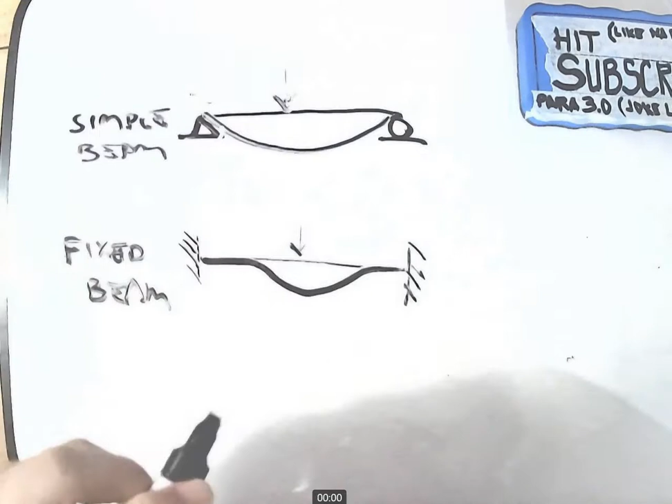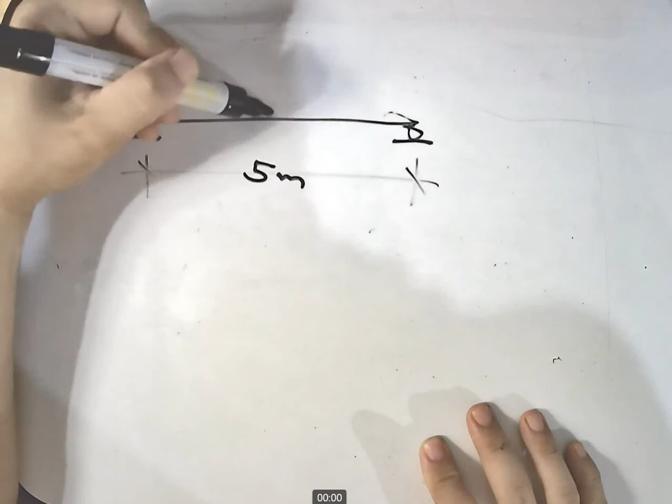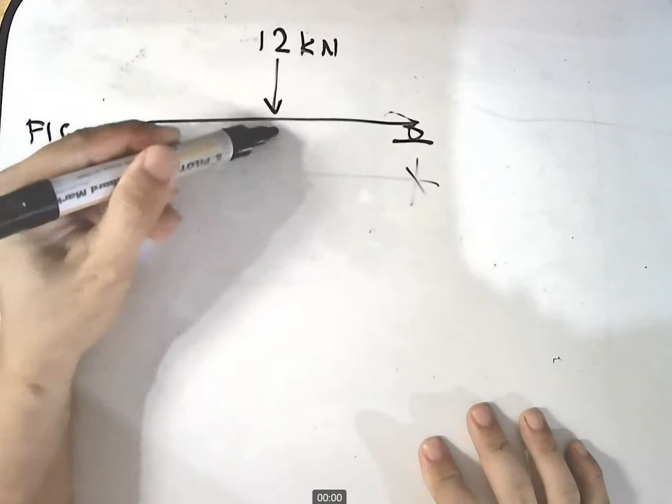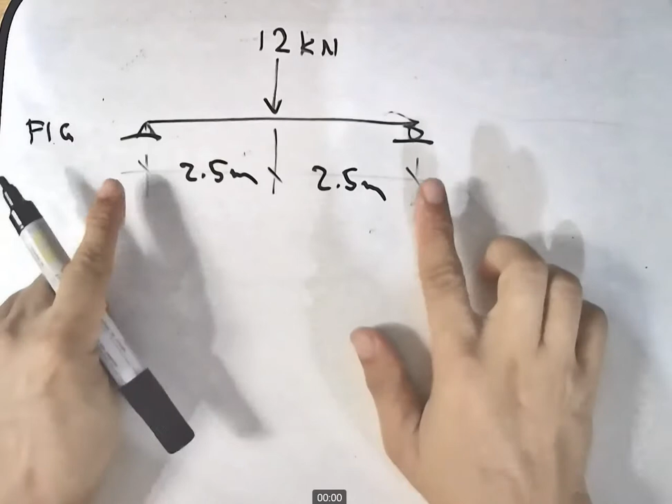So let's say, meron tayong simple beam, pin connected, roller. Ito yung figure. And then, meron siyang length na, let's say, 5 meters. Naglagay tayo ng concentrated load na 12 kilonewton sa gitna. Kapag sinabing gitna, so, magiging 2.5 and 2.5 meters. So, ano ang bubuhat dito sa 12 kilonewton?

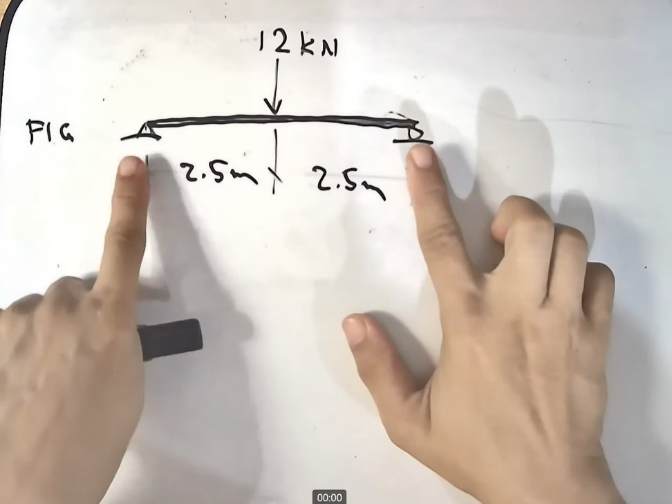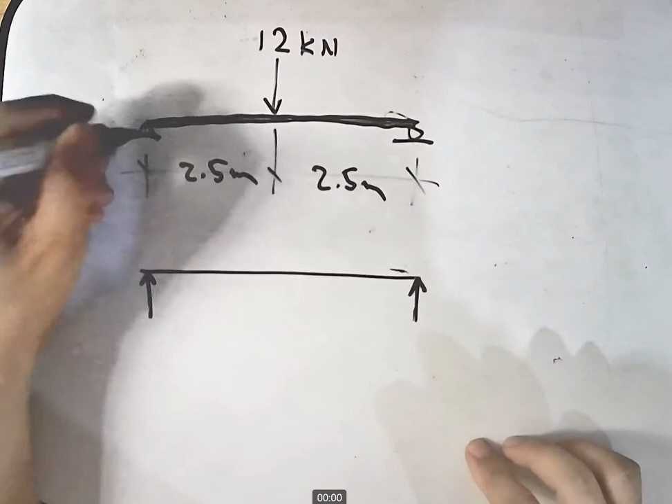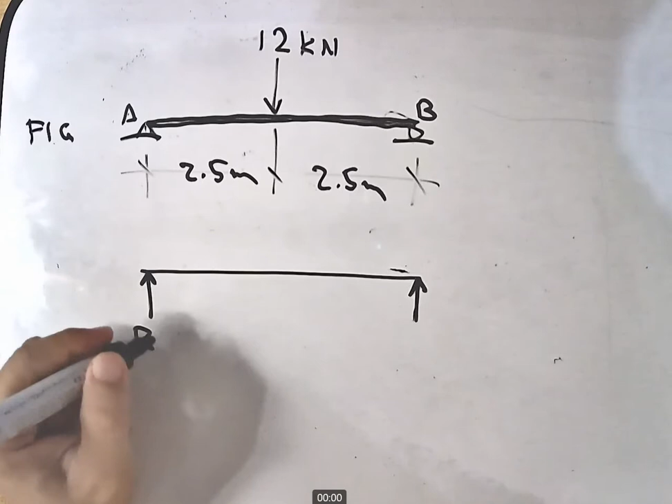So, let's take this as point A and then point B. So, meron tayong vertical reaction dito. So, RAV, then RBV. So, this simply means reaction at point A vertical, reaction at point B vertical.

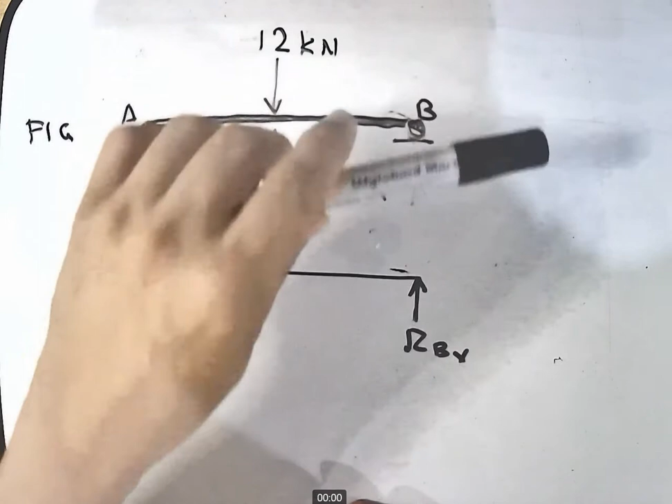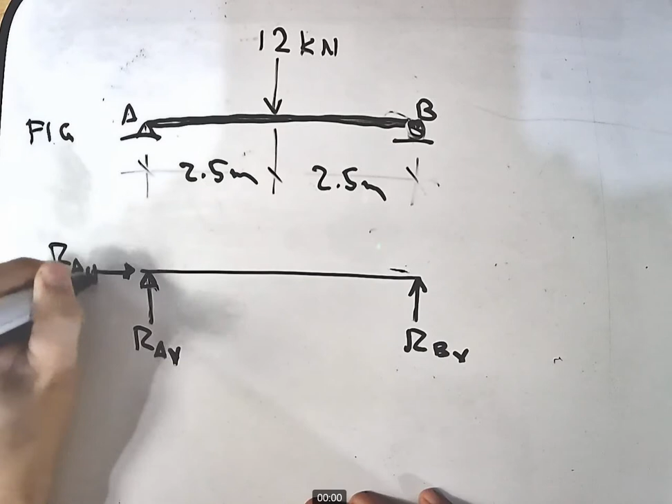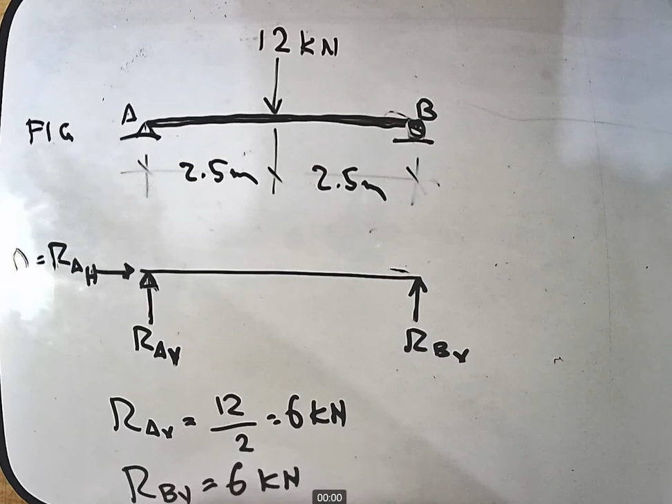Okay, so let's take this as RAH. But since wala tayong horizontal load, your RAH is equal to 0. And then, now, notice na nasa gitna yung 12 kilonewton. So, reaction at AV now is equal to 12 divided by 2. So this is now 6 kilonewton. Likewise, reaction B vertical is also 6 kilonewton. So, as a check, summation forces vertical is equal to 0.

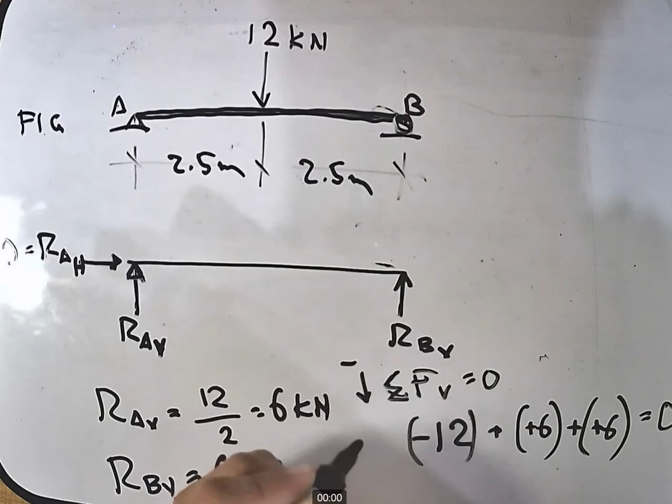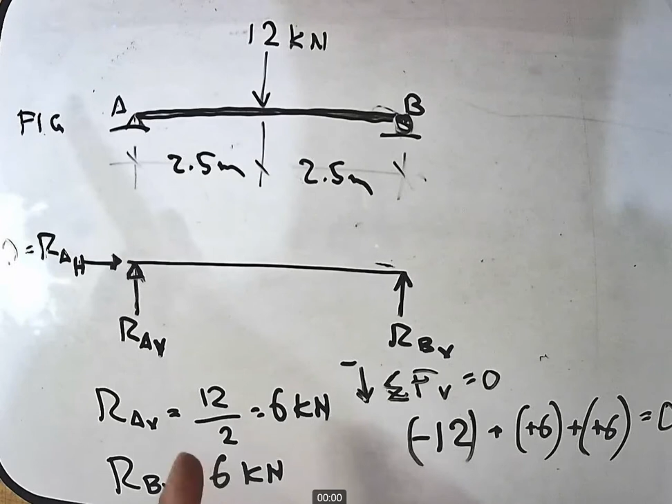Positive 6 kilonewton plus positive 6 kilonewton should be equal to 0. So, take note na ito ay summation, kaya plus, plus, plus. And then, you always consider the direction. Kapag pababa is negative. Kapag pataas ay always positive. Nandun yan sa sign convention dun sa ating previous lecture. And then, summation equal to 0, this is also equilibrium condition.

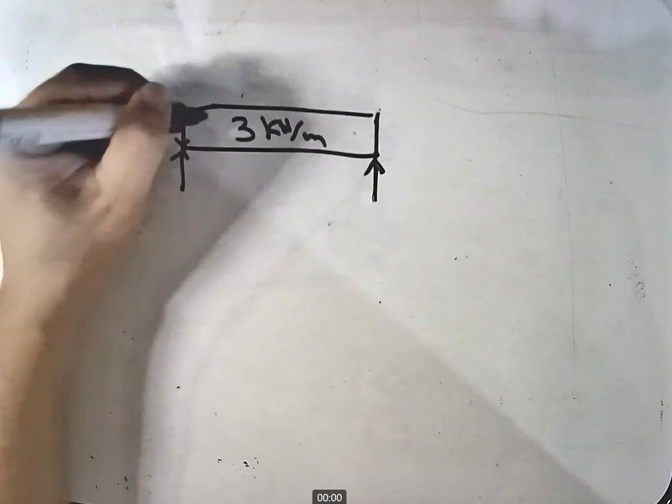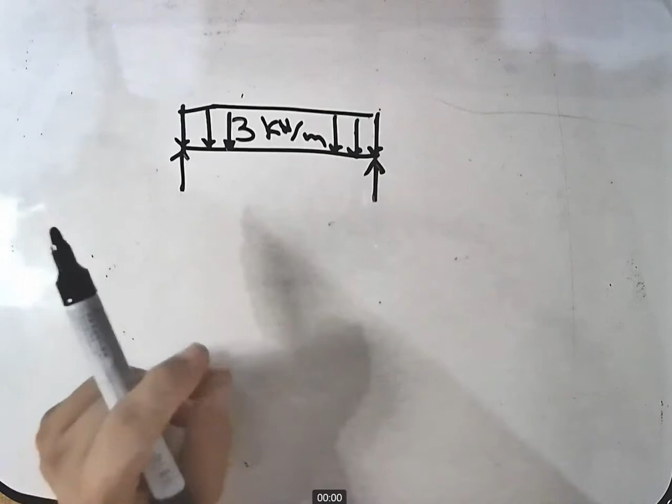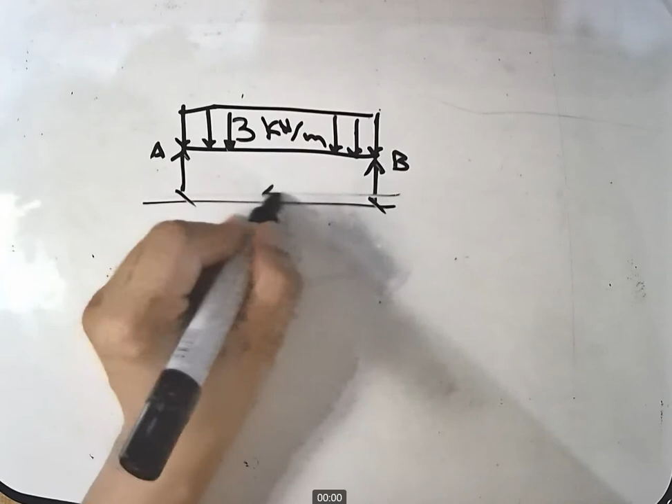Okay, another example is uniformly loaded. Again, let's say simply supported again. Let's say this is 3 kilonewton per meter. Kapag sinabing uniformly loaded, ganyan siya. Ibig sabihin, at every meter length, merong 3 kilonewtons. So, let's say, this is again A, and then B. And, let's say, the length is 4 meters. So, let's say this is pin connected and roller connection at the point B.

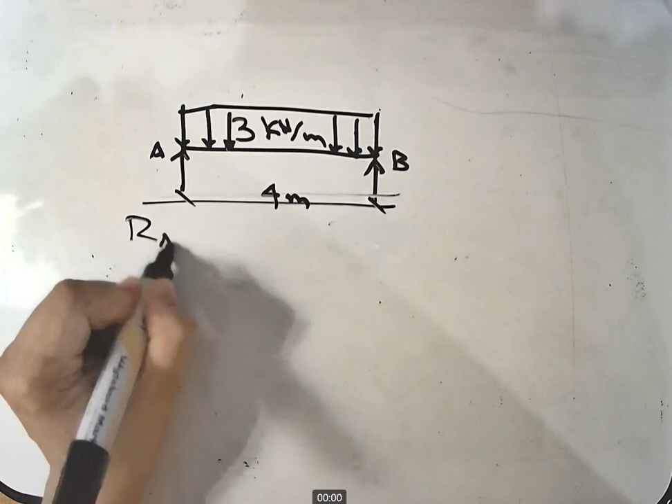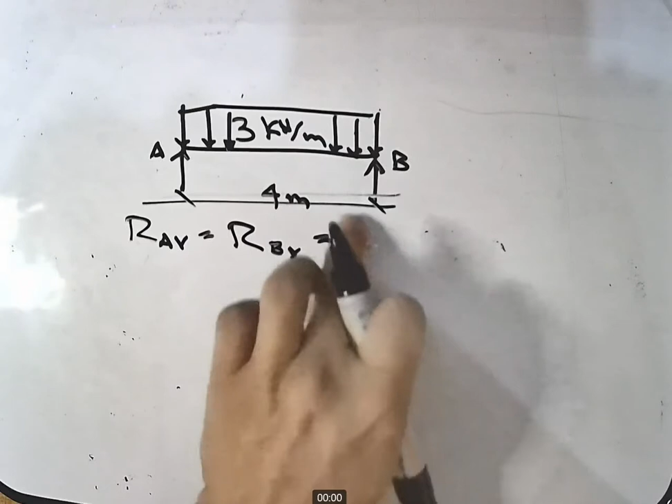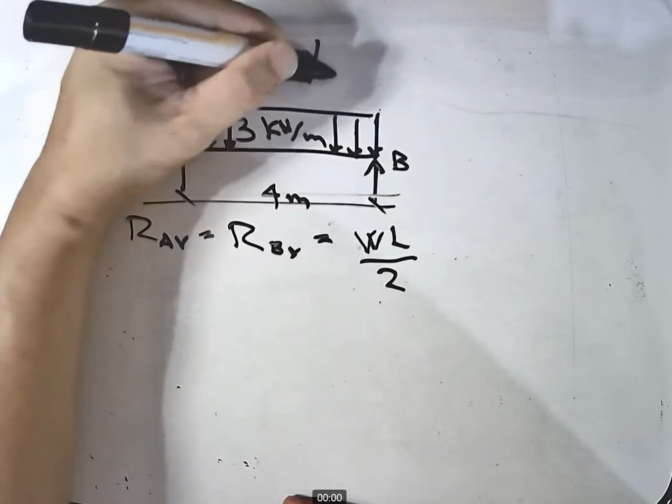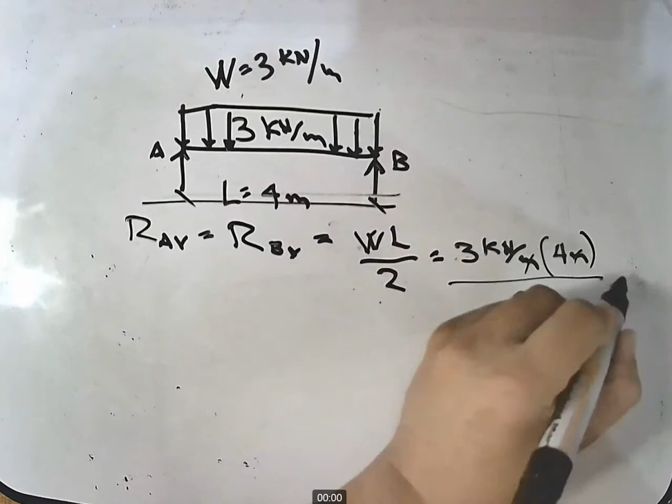So, RA vertical is the same as RB vertical, which is equal to the uniform load, 3 kilonewton per meter. You multiply that by the length. Okay, so gawin na lang natin equations yan. W times L all over 2, wherein your W is 3 kilonewton per meter, and then your L is 4 meter. 3 kilonewton per meter, multiply that by 4 meters, and then divided by 2. So magkakancel ngayon yung meter and meter. So this now becomes 6 kilonewton for reaction AV and reaction BV.

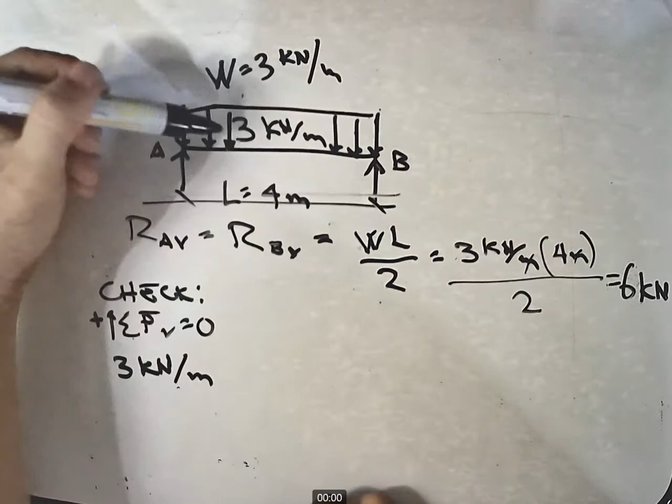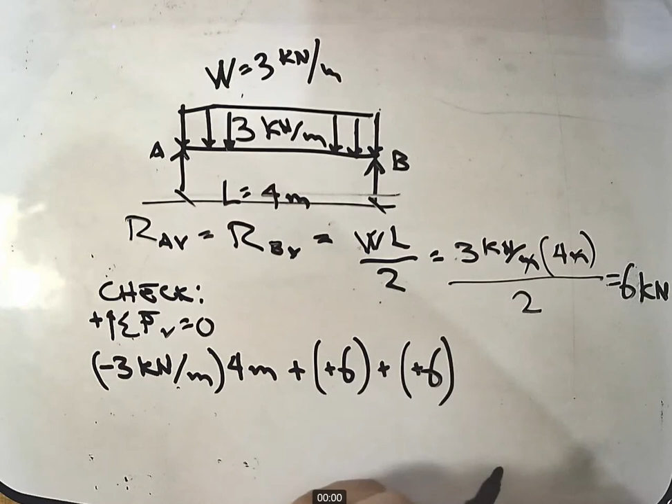So as a check again, always make sure na gagawa ka ng check. Summation forces vertical is equal to 0. This time, yung upwards is positive. So, 3 kilonewton per meter. Take note na yung weight is downwards. So, negative sign yan. And you multiply this by the length na 4 meters para maging concentrated load. Plus reaction AV. So, take note, reaction is upwards. So, positive 6 plus reaction BV is equal to 0.

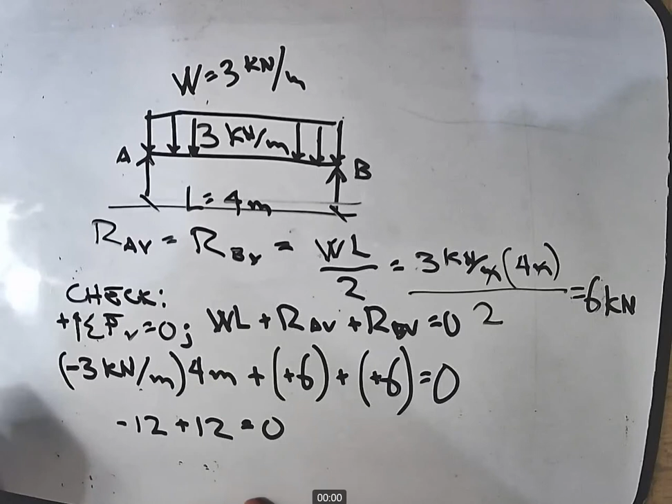This equation is like this. WL plus RAV plus RBV is equal to 0. Dahil summation yan, kaya plus plus plus ang gagamitin natin. But what is W again? Dito 3 kilonewton per meter. Walang nakalagay na negative. Pero that is weight. Obviously, ang weight, the direction is always downwards. Kaya, maglalagay tayo ng negative doon. So, simply put, this is negative 12 plus 12 will give you 0. Okay, so ganyan ang reactions for simple beams.

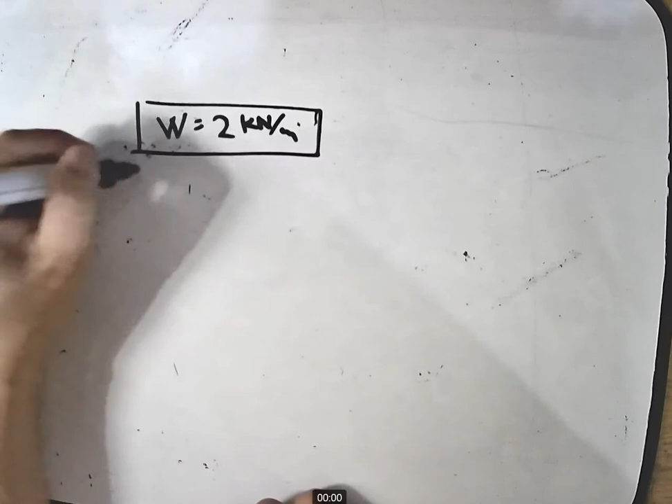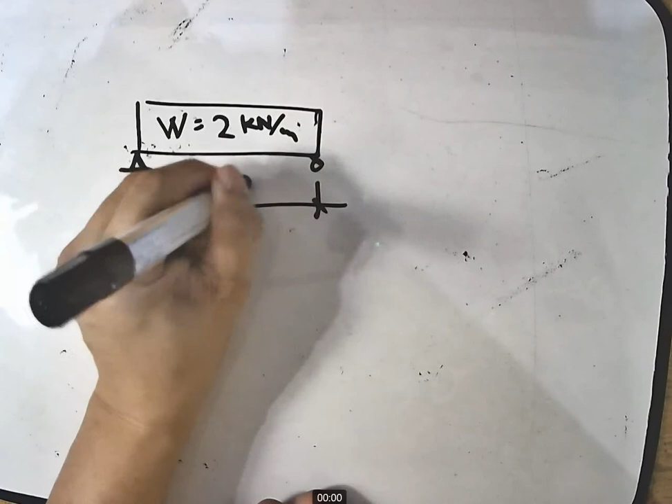Next is, with regards to superposition naman. Meron tayong weight or uniform load dito na, let's say, 2 kilonewton per meter. Then this is pin connected, roller connected, at a length of, let's say, 3 meters. With respect to superposition, this simply becomes like this.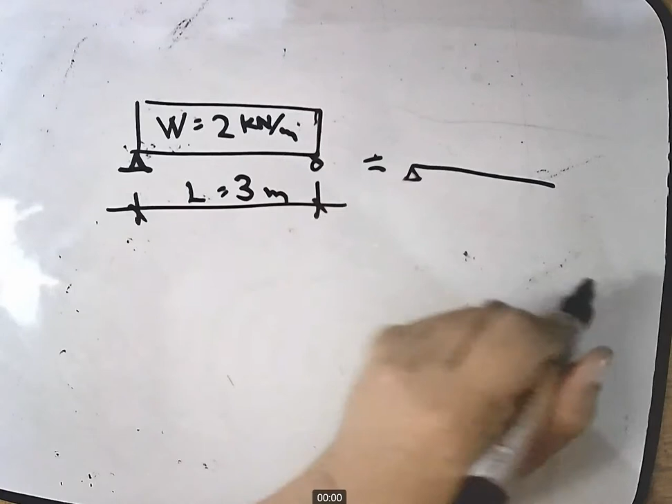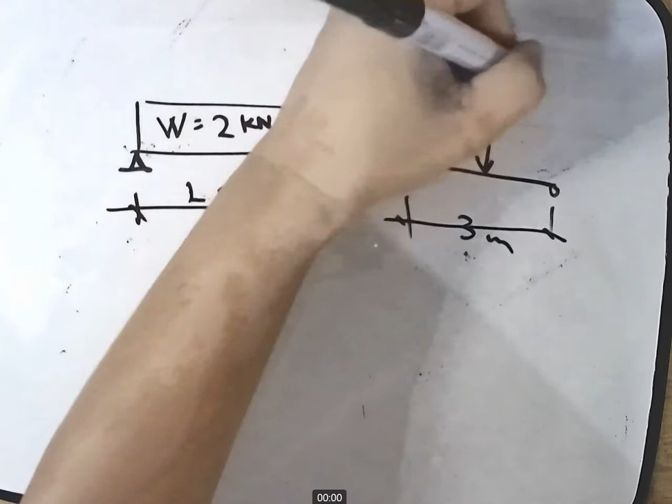So, maintain yung supports still at 3 meters. Hindi magbabago yan. Pero yung load mo, magiging concentrated load na. So, simply that becomes now W times L, or that is 6 kilonewton na. Now, this is acting at L over 2, or that is 1.5 meters and 1.5 meters. Your reaction would be 3 kilonewtons. Okay, so this is also 3 kilonewtons.

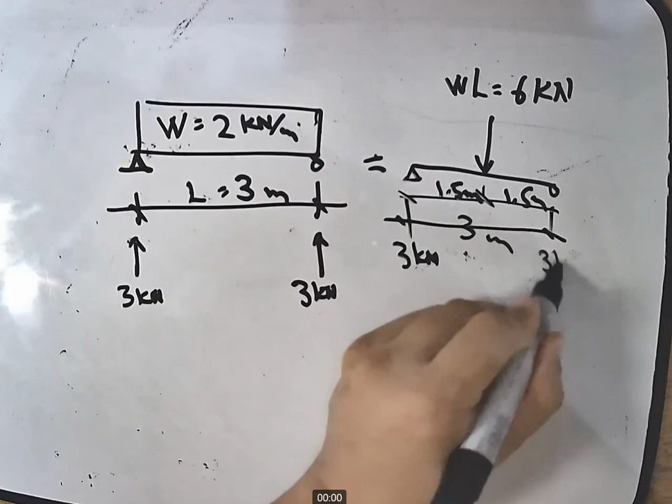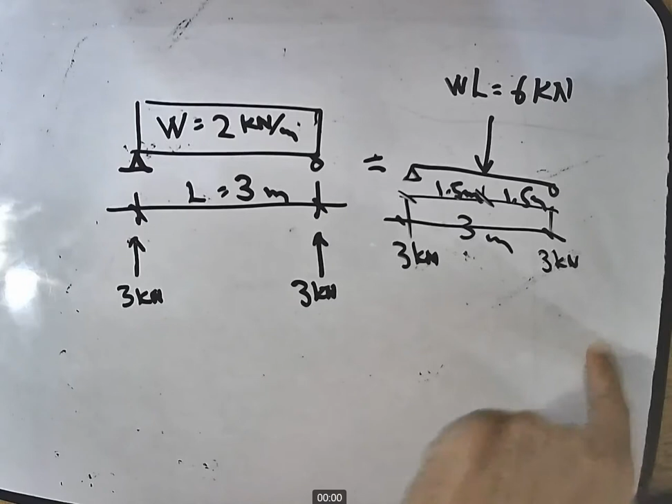Summation forces vertical is always 0. So negative 6 plus 3 plus 3 is again 0. So that is superposition. Another example of superposition is, let's take the case of a triangular loading. Ganyan. And from this loading, yung load mo dito sa gilid ay 0. Tapos, yung load mo dito sa gilid, let's say, W. Okay? Maglagay tayo ng values. And this is your L.

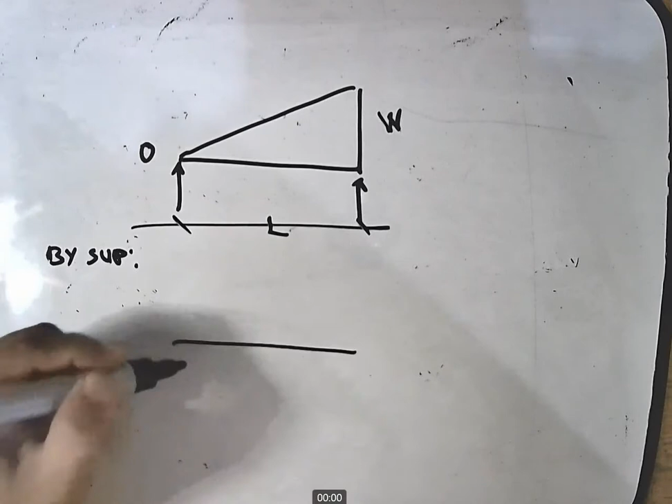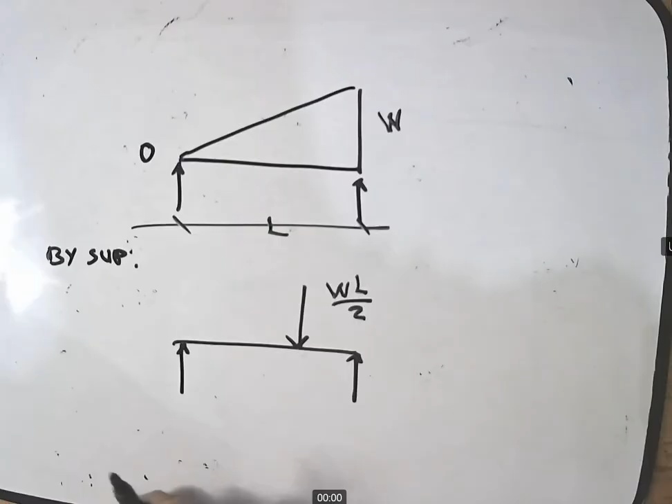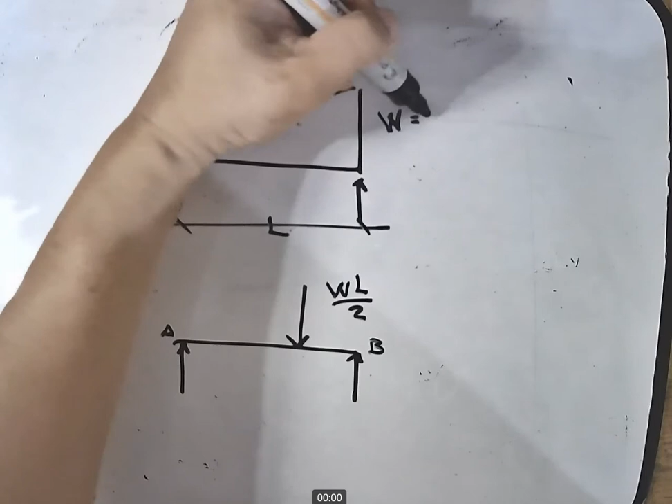By superposition, magiging ganito yan. Meron tayong concentrated load dito. So, ang ibig sabihin, ang value ng concentrated load now would be W times L over 2. Yan yung kanyang concentrated load. Pero, mag-iiba na ang reactions mo dito. Hindi na sila pareho. Now, let's take this as point A and then B. Lagyan natin ngayon ng value. Let's say W here is 3 kilonewton per meter. Tapos yung length naman natin ay, let's say, 5 meters.

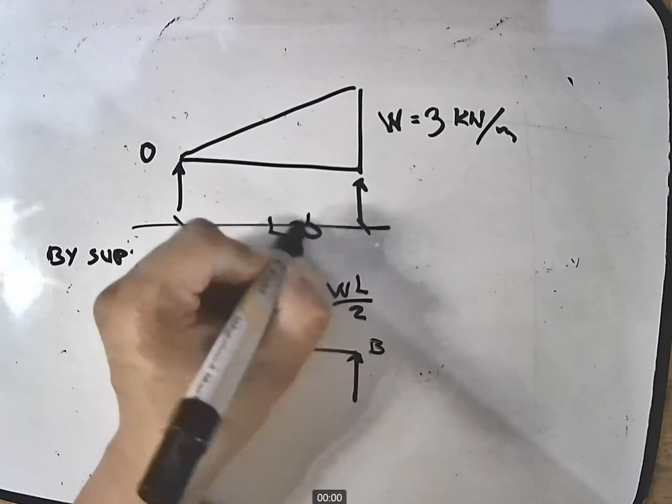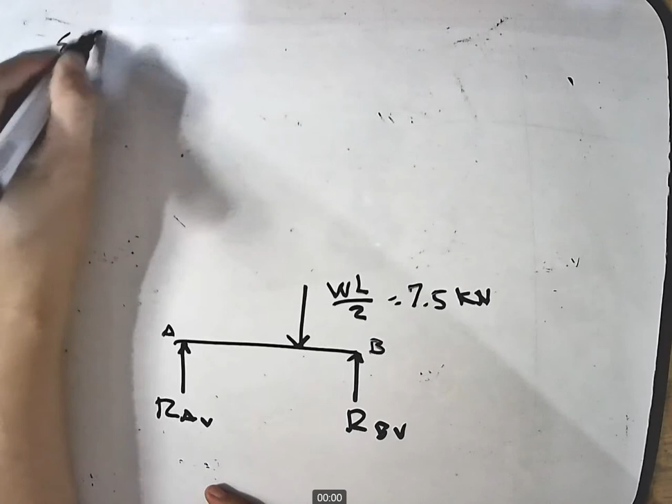So yung concentrated load niya ngayon magiging 7.5 kilonewton. Why? 5 times 3 is 15 divided by 2 will give you 7.5. Pero, iba na ang computation mo ng reactions. Okay, so RAV, RBV. So, erase natin to. This time, we will be using summation moment. Summation moment at A is equal to 0, taking clockwise as positive.

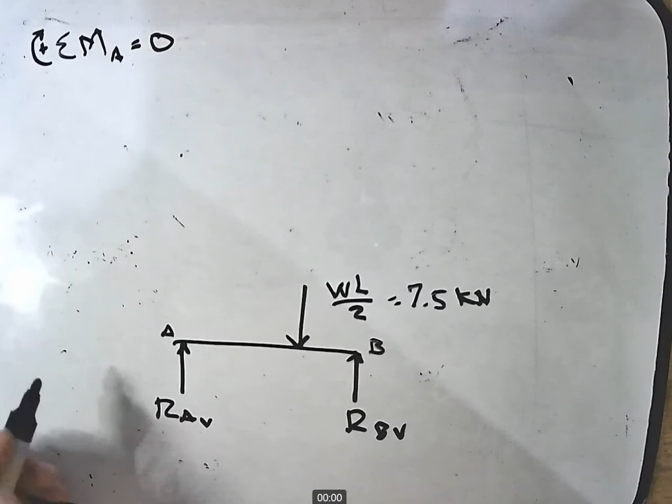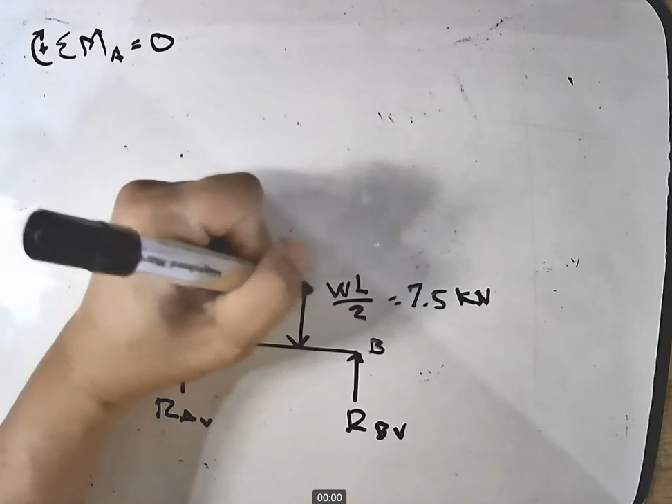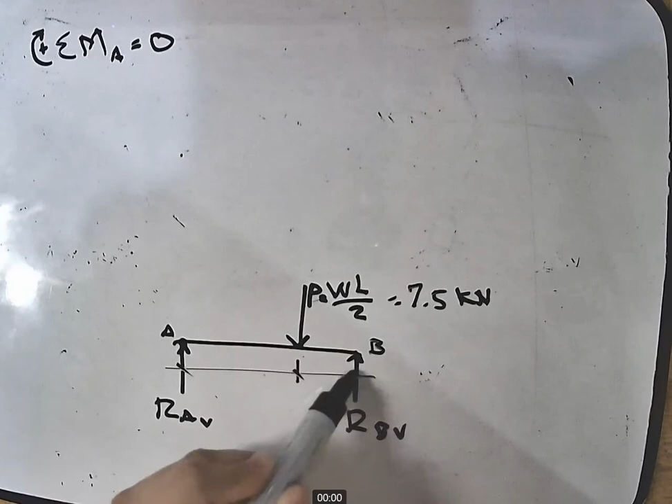So, dito tayo ngayon take moments. Notice na si concentrated load P is, with respect to your axis at A, mag-rotate siya ng clockwise. So, clockwise moment siya. And what is this lever arm? Take note na ang centroid ng triangle is always at 1/3 and 2/3 of your L. So this is now 2/3 of L na 5 kanina. This is 1/3 of L na 5.

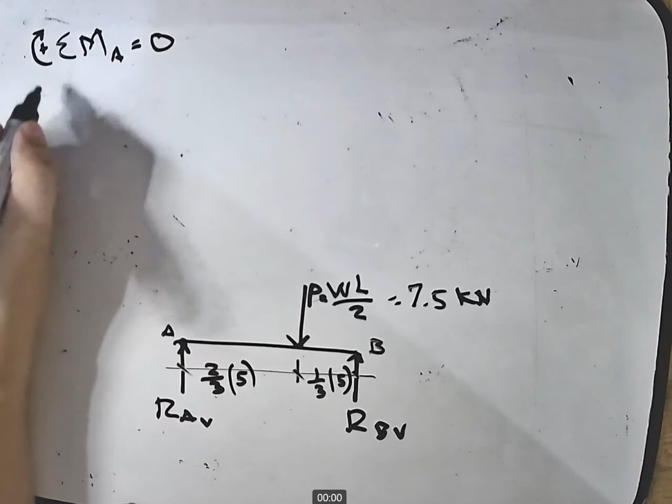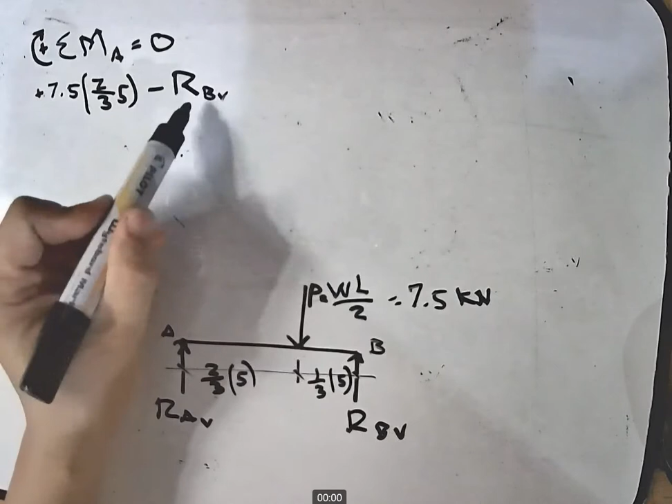So sa summation moment at point A, this will be 7.5 times lever arm na 2/3 of 5. The direction is clockwise, kaya positive. Next. Ano ang direction ng reaction at BV? Direction ng reaction at B is counterclockwise. So, minus reaction BV. But what is the lever arm from point A? It is the length of your beam, which is 5. So RBV times 5 equal to 0.

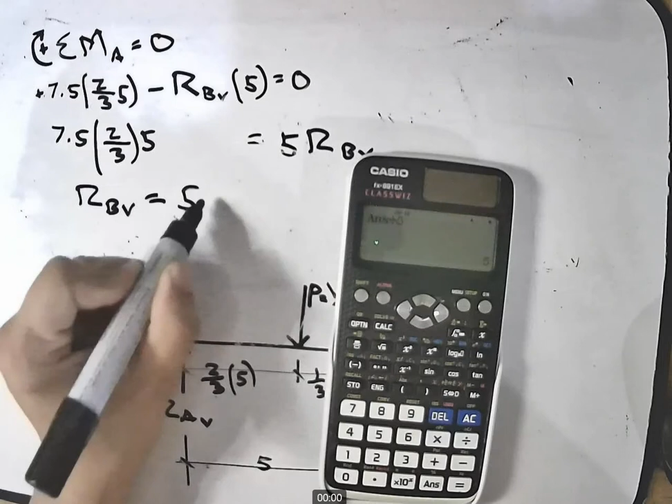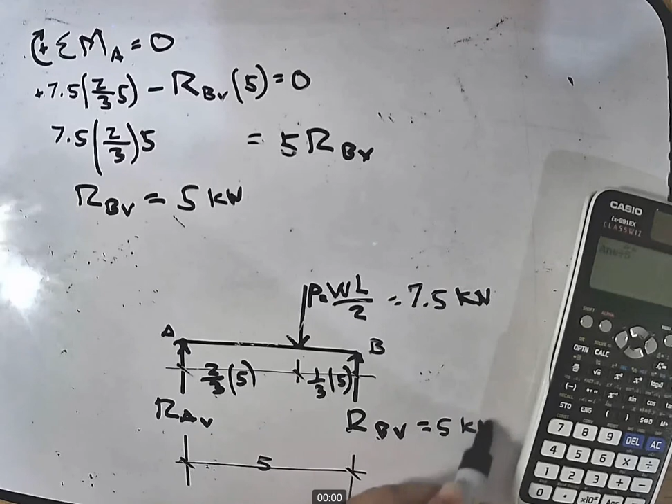So, from here alone, isa lang ang unknown natin. So, reaction at B sub V is equal to 5 kilonewton. Okay, next. Let us solve RAV. This time, let's take moment at B. Summation moment at B equal to 0, taking clockwise direction as positive. So at point B, ano ang magko-cause ng clockwise rotation? It is RAV ngayon.

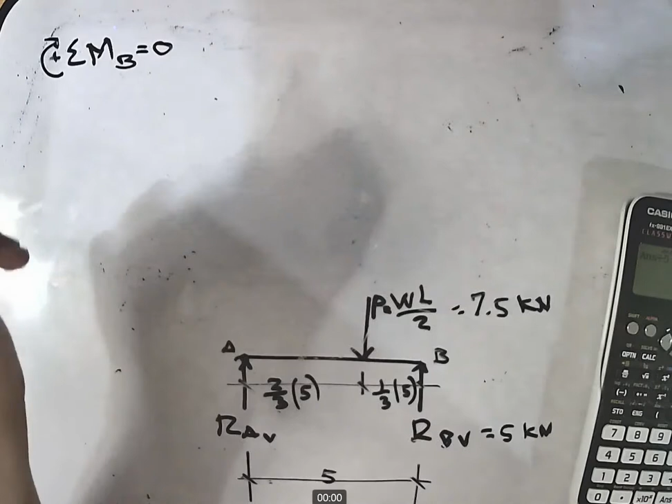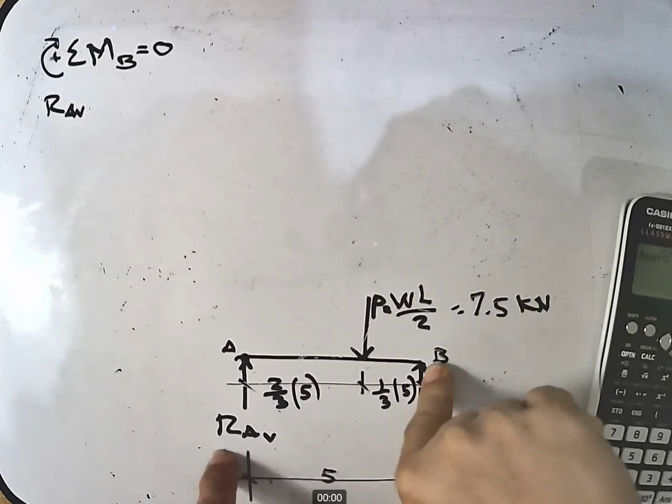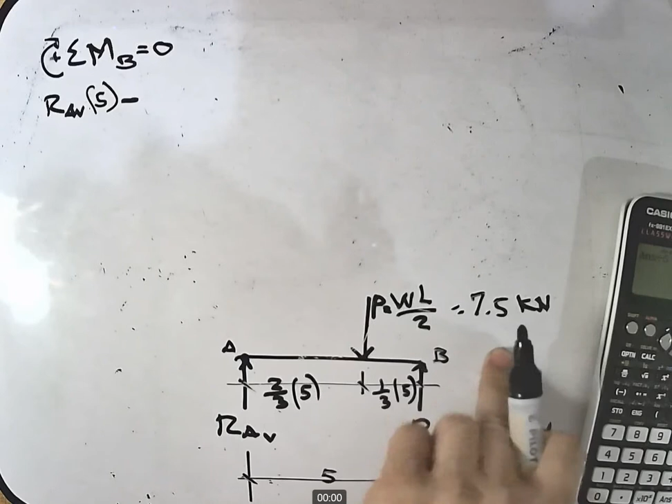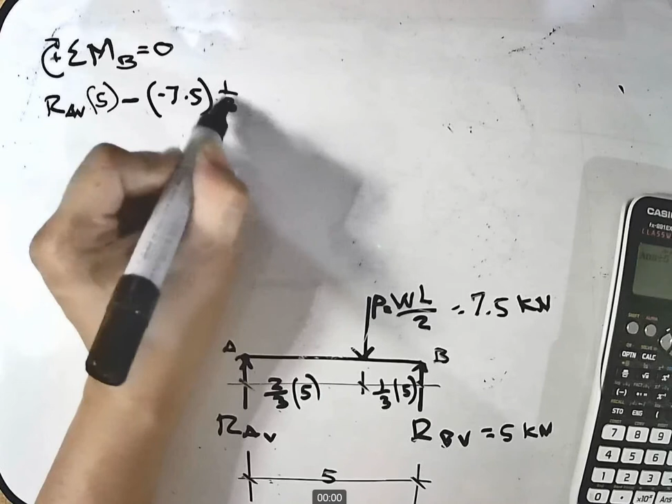So RAV from point B, this is your axis of rotation. Ano ang lever arm ng reaction AV? It is 5. With regards to moment, ano ang direction ng concentrated force? Clockwise or counterclockwise? It is counterclockwise, so minus yan. Ano yung kanyang force? 7.5. So minus 7.5, tapos yung kanyang lever arm is 1/3 of 5, is equal to 0. Disregard muna natin yung sign ng 7.5. Ang importante, moment tayo.

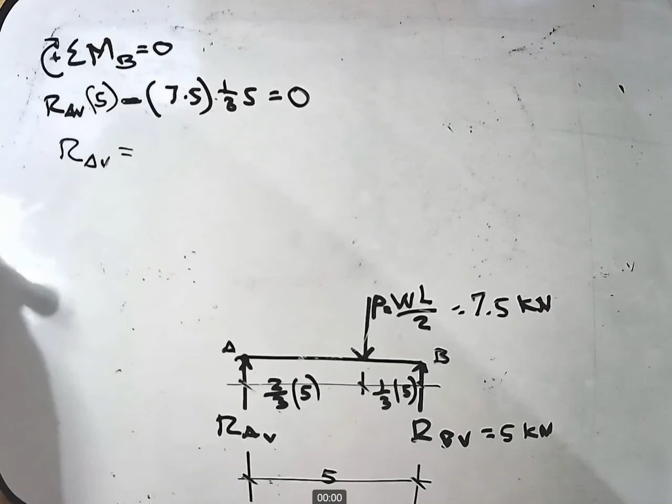Always remember na mag-apply yung direction ng upwards, downwards kapag summation forces vertical. Pero pag moments, ang i-consider nating conventions, yung clockwise, counterclockwise. So, RAV now becomes 2.5 kilonewton. So this now becomes 2.5 kilonewton.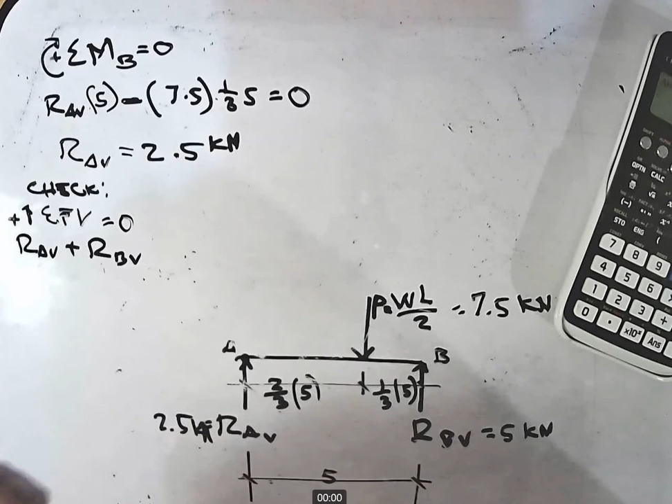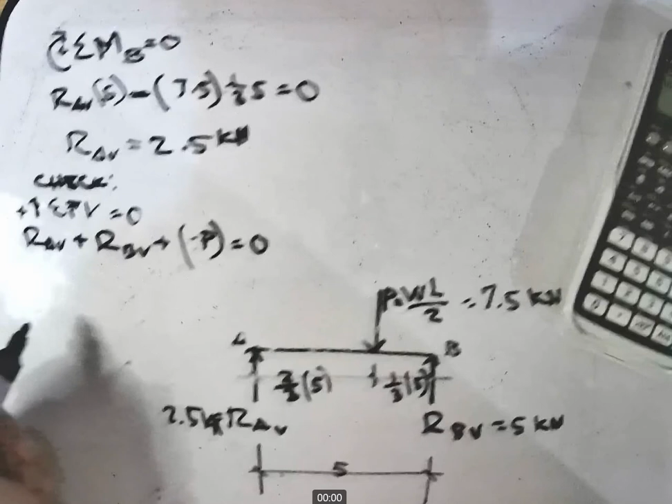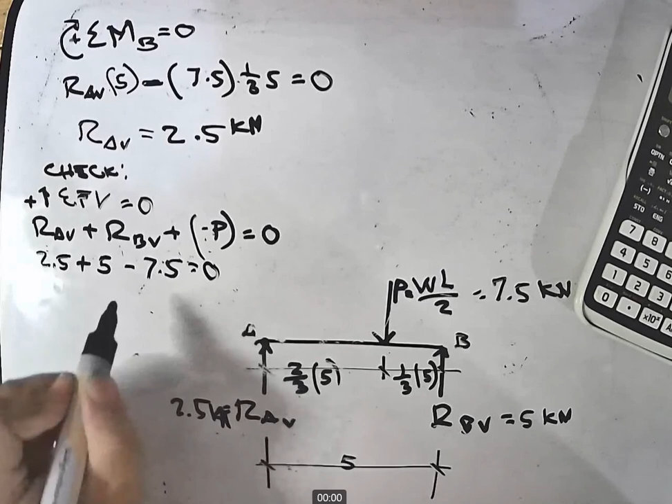As a check, summation forces vertical equal to 0, taking upwards as positive. Ano yung mga upwards natin? You have RAV plus RBV plus your load, which is negative P, equal to 0. So, RAV is 2.5 plus reaction BV 5 and then minus P na 7.5 equal to 0. So that is simply 0 equal to 0. Therefore, okay.